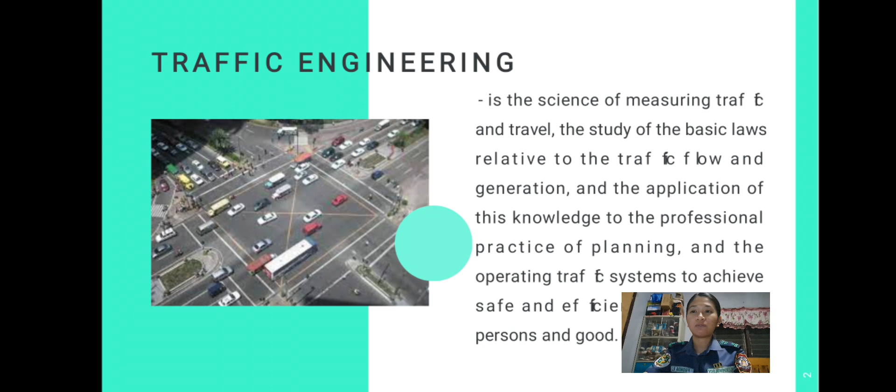So what is traffic engineering? It's the science of measuring traffic and travel, the study of the basic laws relative to traffic flow and generation, and the application of this knowledge to the professional practice of planning and operating traffic systems to achieve safe and efficient movement of persons and goods. So basically, traffic engineering is a branch of civil engineering that uses engineering techniques to achieve its goal, which is to have safe and efficient movement of persons and goods.

So the goal of traffic engineering is to ensure the safe and efficient movement of people and goods on roads and highways. Traffic engineering helps to optimize road space, develop road safety strategies and programs, assess and implement traffic collision reduction measures, accessibility, parking and traffic impact studies, integration of active transportation and transit into road designs, intersection design and operation, and road safety studies.

In traffic engineering, planning is also included, the different kinds of traffic structures like traffic lights and traffic signs. Bridges can also be included.

So basically, these things listed here are what help achieve the goal of traffic engineering, which is to ensure the safe and efficient movement of people and goods on roads and highways. For example, optimize road space, so that the space of the road can be used, and develop road safety strategies and programs.

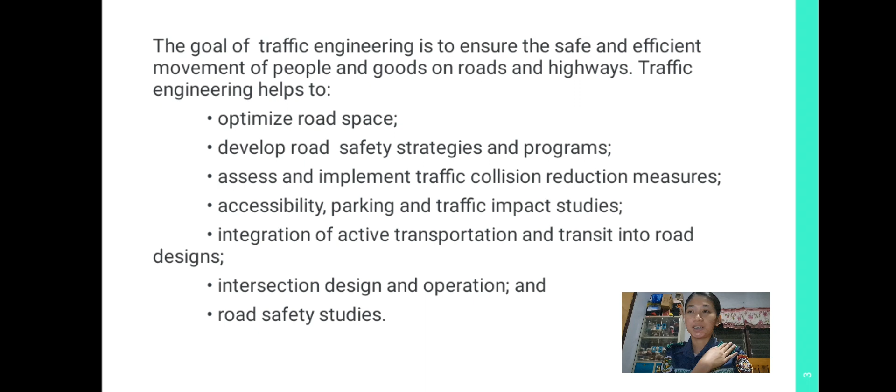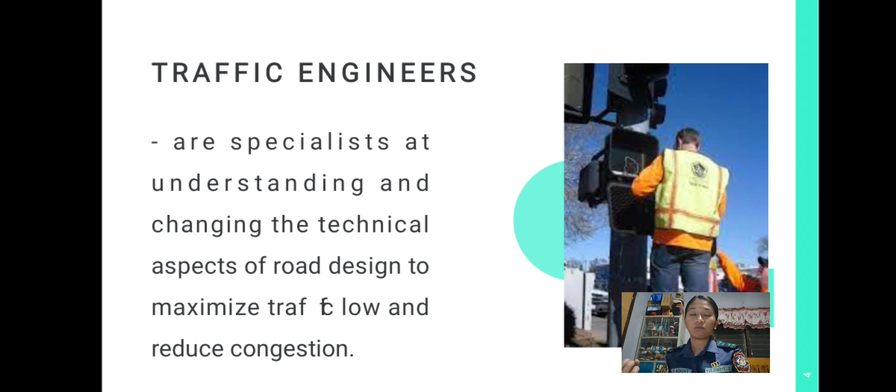Traffic engineers are specialists at understanding and changing the technical aspects of road design to maximize traffic flow and reduce congestion. So traffic engineers are the people behind traffic engineering, because they are responsible for implementing the goal of traffic engineering, which is to ensure the safe and efficient movement of people and goods on roads and highways.

Traffic control devices include street signs, traffic signals, and road markings. These signs, signals, and stripes guide drivers in navigation and control of their vehicles. Each traffic control device is governed by standards of design and usage. These traffic control devices can be signs, signals, and markings that you see on the road that regulate, give warnings, and give information to the driver as well as the pedestrian.

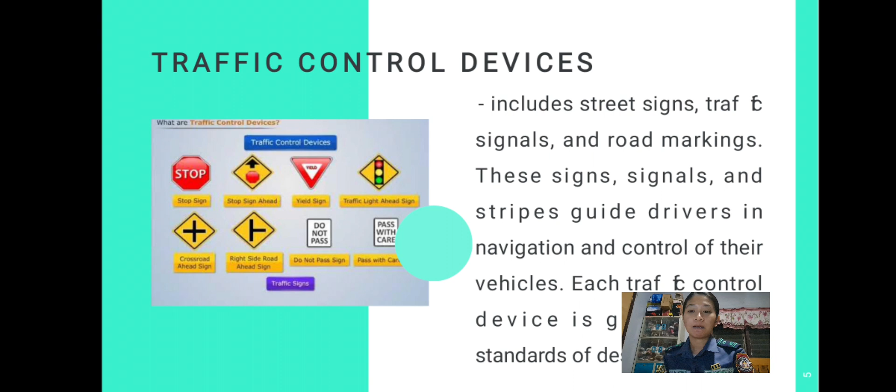Next, functions of traffic control devices. The primary purpose of a traffic control device is to provide information to drivers so they can operate their vehicles safely along a highway or street.

The 5 basic criteria of a traffic control device are: first, address a need, this is to give what the driver demands. Second, command attention, to immediately get the focus or attention of the driver. Next, convey a clear, simple meaning, so that at first glance you already know the meaning of the symbol.

Next, command respect from road users, this is what we call the give and take that drivers talk about. Next, give adequate time for response.

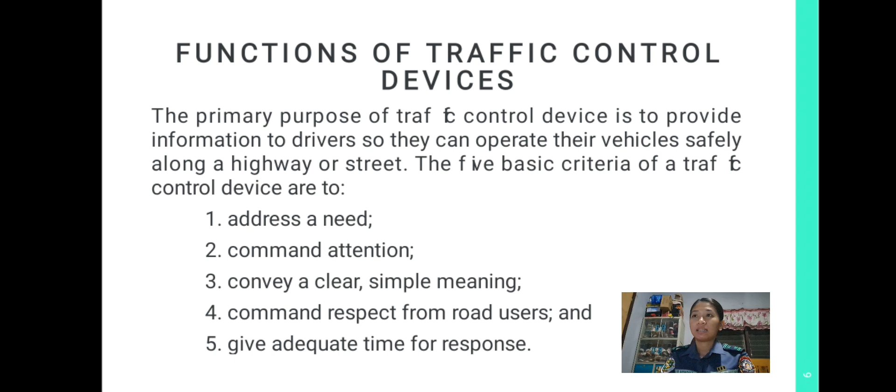Next, history of traffic control devices. The use of road signs were the first traffic control devices. The use of traffic signals for controlling traffic was recorded in 1868 in Great Britain. In the early 1900s, the automobile began, so traffic control devices were also born around that time.

Manually controlled traffic lights were installed in Cleveland in 1914 using electric lights that lit up the words stop and move. In 1920, the first three-color traffic signal was installed in Detroit. In 1952, an early version of the Don't Walk signal device was first implemented in New York.

Itong manually controlled traffic lights, ginagamitan siya noon ng gas, pero tumigil yun kasi nagkaroon ng explosion incident. Kaya pinatigil na yung paggamit nun.

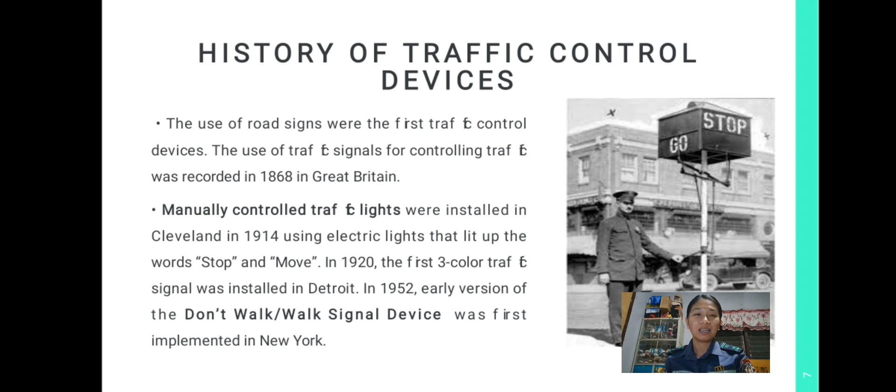Next, the standardization of traffic signs began in 1922: W.F. Rosenwald of Minnesota, J.T. Donaghey in Wisconsin, and A.H. Hinkle of Indiana. Itong tatlong ito, sina Rosenwald, Donaghey, saka si Hinkle, kumbaga sila yung mga pioneers kung bakit nagkaroon ng traffic control devices sa kalsada, kasi nag-come up sila sa idea na magkaroon ng uniformity ng mga traffic control devices sa kalsada ng buong mundo.

Next, they reported their findings at the 1923 annual meeting of the Mississippi Valley Association of State Highway Departments. After some debate, the organization agreed on some distinct shapes to be used for various situations. So ito yung napagkasunduan nila.

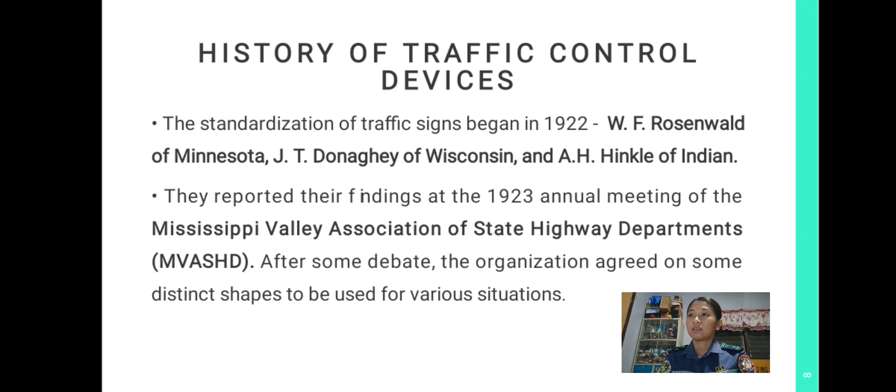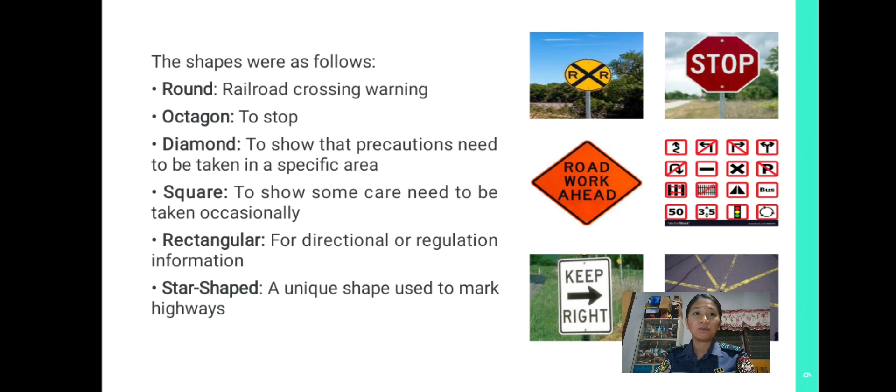Next, star shape, a unique shape used to mark highways. Ayan naman yung nilalagay sa kalsada mismo.

Next, in 1924, the first National Conference on Street and Highway Safety proposed standardization colors for traffic control devices. This includes signs with white letters on a red background indicating stop. Ayun nga, yung kapag nakakita ka ng white letter tapos yung background niya red, ibig sabihin stop na yun.

White letters on a green background signified proceed. Ayan yung sa mga lugar naman yan.

Next, black letters on a yellow background advise caution, and black and white signs providing information on direction and distance were specified for every intersection and junction. Yan, example yan yung nasa baba.

Next, characteristics of traffic control devices. Number 1, color. Specific colors are used to trigger instant recognition and reaction.

Best example nito sa color ay yung mga traffic lights, yung green, yellow or orange, saka yung red. Kasi sila lang yung merong meaning nun. Kapag nakita mo na yung color na yun sa traffic lights, alam mo na agad yung meaning nun.

Next, nighttime visibility. Traffic control devices are made visible under nighttime operating conditions by either being separately lighted or retro-reflectorized, so that the light coming from vehicle headlamps is bounced off signs and other devices back to the eyes of drivers. Hindi lang naman umaga kasi ginagamit yung kalsada, kaya kahit nighttime, dapat visible pa rin yung mga traffic control devices para makita ng mga driver.

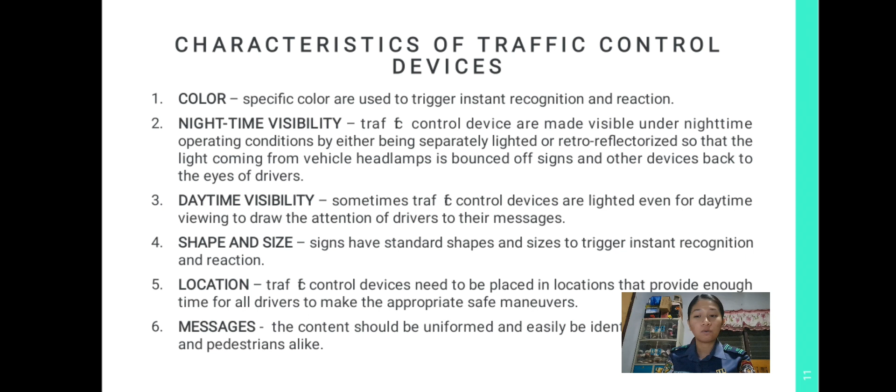Next, messages. The content should be uniform and easily identified by the drivers and pedestrians alike. Gaya ng sabi ko kanina, dito sa messages, dapat clear and simple lang para kapag nakita ng driver, alam niya na agad yung meaning at hindi na siya magtatagal ang focus doon, para avoid accident na rin.

So next, classification of traffic control devices. Number 1, traffic signs, provide local information for drivers. It is made from reflective material in high contrast colors. They are highly visible in headlights at night. Signs may use words and simple symbols to communicate meaning. The shape of the traffic sign communicates important information about the sign's message as well.

So dito naman sa traffic signs, dito pwedeng tingnan ng mga pedestrian, yung traffic lights, to regulate the traffic flow, to manage the traffic flow, to lessen the accidents, to increase the safety of drivers, pati na rin yung mga pedestrians sa kalsada.